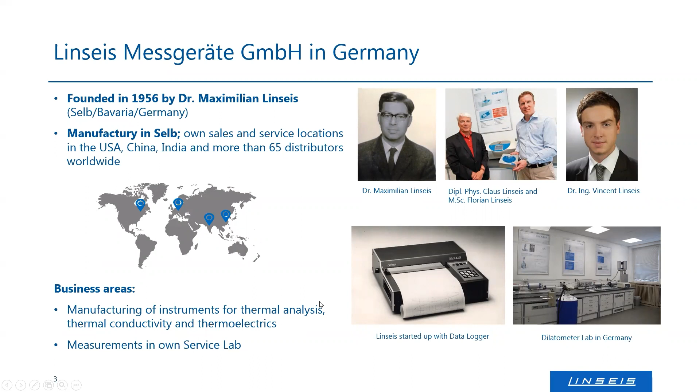The product range we manufacture can be seen on the slide. Usually, I would structure a talk differently if it were about one instrument or instrument series. But as today it's more about hydrogen technologies and what we can do in thermal analysis, I want to go through what's possible and where the research is going on, and then mention which kind of instrument comes into account at what stage of the hydrogen cycle, which we will see in the next slides.

I would just want to show you the overview of products. So we have DSC instruments, we have the classical thermal gravimetric instruments, and the simultaneous thermal analyzers, the combination of DSC and thermal gravimetric analyzer. Besides that, we have a lot of different dilatometers for thermal expansion and shrinkage, as well as sintering studies, and thermomechanical analyzers for deforming measurements, for expansion and shrinkage measurements as well.

And then, as I mentioned, we have instruments for thermal conductivity, which can be flash techniques, hot wire, and guarded heater techniques. We have thin film analyzers. We have thermoelectrical analyzers for microfilms, for thin films, for electrical effects like Seebeck effect, charge carrier concentration, Hall effect. And we do a lot of customization of all these products, meaning we can adjust the temperature range, the pressure range, and the exact sample size, depending on the customer's application.

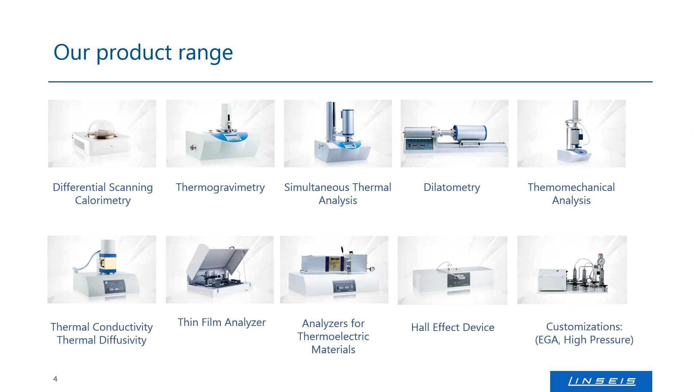Today's topic, back to the topic, is hydrogen and thermal analysis, something that plays a big role at the moment as Germany as well as Central Europe tries to get rid of fossil fuels, get rid of coal, get rid of gas, and tries to be more independent regarding energy. Therefore, there's a lot of research going on, and wherever research is going on, laboratory equipment is also of interest. That's why thermal analysis is strong in hydrogen technologies and is focusing on hydrogen technologies a little bit.

As said, I will structure this talk today a little bit different than I would usually do. I will start with the hydrogen roadmap, so the complete topic and structure of the talk will be along this cycle. The Fraunhofer research facility here in Germany, which is quite famous and involved in many research topics, did a so-called roadmap and plan regarding hydrogen, how it should look like and where the research is going, and what's the goal more or less. I think this structure is quite useful to explain where the research is going on, what they do, and I can show you quite easily where thermal analysis gets involved in this cycle.

The idea is to replace energy that we have, like coal plants, gas power plants, even nuclear power plants, by renewable so-called green energy resources. That means photovoltaic, windmills, biomass power plants that should provide energy. Then the energy shall be transferred by electrolysis or other methods into hydrogen, and the hydrogen is more or less the energy carrier. It can then be stored, exported, used as a fuel or in engines or in technical use, even domestic use would be possible. By using it, it will be transferred back into water, it goes back to electrolysis, and so you have a cycle.

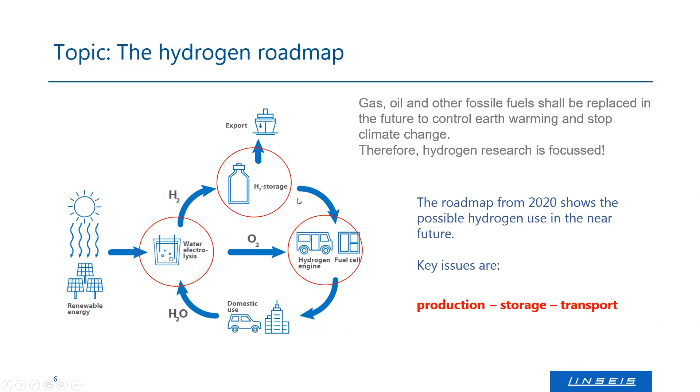The Fraunhofer Research Facility also did this overview about hydrogen research in the near future. I just summarized this a little bit to show you where the research topics really are. So there's a lot of research regarding electrolysis, the creation of hydrogen out of energy, and research regarding storage, platform technologies, production rates should be optimized, the energy transfer rate should be optimized. Of course, there are catalysts that should be used, and so on.

Besides that, the industry does a lot of transfer technologies. They try to use hydrogen wherever methane gas or other fossil fuels are used directly, for instance in steel production. They want to make methane pyrolysis. They want to make ammonia as an engine fuel because ammonia can be a chemical storage way for hydrogen again. They develop high volume storage capacities and many more. So that's what the industry does as well.

And then there's the traffic and mobility sector, because hydrogen storage for mobility is something different than hydrogen storage in technical or power plant use. The on-site hydrogen generation plays a role when it's coming to mobility. So there's a lot of research, there's cooling techniques for mobile storage, there's optimization of the fuel cells themselves, which I will show you, and the fuel cell production lines are also under research.

And then the last topic will also be power generation. So power storage in form of hydrogen is fine, but getting the power back also has many ways. One is the fuel cell, others would be direct burning of hydrogen or chemical reactions. Direct coupling with renewable energy concepts is of interest, and there are also on-site concepts. So that's what really the research topics are at the moment, just to summarize that a little bit. And now I will go through this step by step.

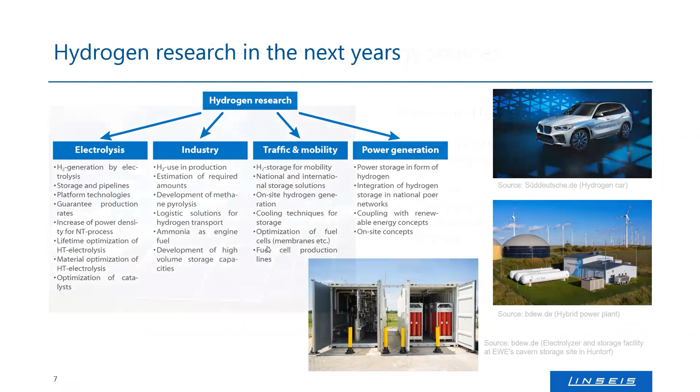As I mentioned, first of all, the idea is to replace fossil fuels, nuclear fuels, and power plants by so-called green energy. Green energy means energy that comes from the sun directly without any emission of carbon dioxide if possible, or if there is emission of carbon dioxide, then it should be so-called green biomass, so wood and not fossil biomass like coal or something else.

The typical resources or typical sources of power are windmills, solar panels like you see here on the picture. Besides that, there are also geothermal plants and biomass plants. As mentioned, the goals are mainly the reduction of carbon dioxide emission and becoming or getting an alternative to gas and oil use.

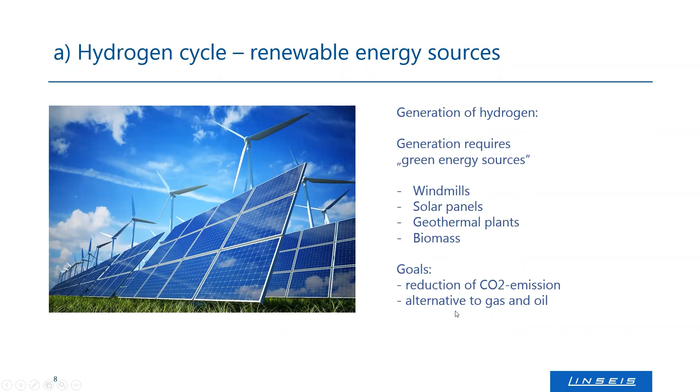When it comes to these kind of energy production facilities, of course there's material research going on. I'm focusing a little bit on the windmills and the solar panels, which is where we already have customers.

The windmill blades are usually made of light composite materials or light alloys because they should not have much weight, to improve the amount of power they can produce. If the wind has to move a very heavy blade, a lot of the wind's power is already gone just moving it. The lighter the blade, the more power you can get. However, the material should be stable. It should not expand or deform much if sun hits it, or if temperature changes, or if the strength of the wind changes. Therefore, these materials undergo quite a lot of research.

I had a customer that manufactured composite materials, glass fiber materials, and composite materials for that kind of blade. They had different mixtures, and the application was to measure the expansion, to measure transformation temperatures when it gets soft, when it bends, and when it changes its phase.

As said, I want to focus on the main steps, not on the energy creation. So the next step would be the hydrogen cycle, the transformation from electrical to chemical energy.

The idea is to create green energy by windmills, solar panels, and power plants, and then transform it into something you can store. You all know electricity cannot be stored that easily. Of course there are batteries, however you need a lot of material and matter to build a battery that can save only a little, tiny amount of energy. They are improving, but a battery that can feed a whole city or a facility like a car production site must be huge, really huge.

The state of the art is that you have to create the power as you need it, on demand, or store it somehow differently. One way, and the way we're talking about today, is to save it as hydrogen.

The idea is using classical electrolysis to create hydrogen out of energy. It's quite easy: you transform your energy into DC. The DC is then applied to the water by an anode and cathode that separate the water molecules into anions and cations. They gather at the anode and cathode, forming hydrogen on one side and oxygen on the other. The oxygen can be released to the atmosphere easily since it's already there, and the hydrogen can be collected quite easily.

So that's where we are already involved, more or less.

Besides electrolysis, there's another way to create hydrogen: out of biomass. If you have biomass like waste from food production, waste from plant harvesting, or waste from animal farming, you can use it not only to fire it or create methane gas and burn that.

Usually it goes like this: you have coal, biomass, or others, and you feed them into a gasifier, which is simultaneously fed with oxygen and water vapor. The water vapor reacts with the carbon contained in your biomass and forms hydrogen and carbon monoxide. If you feed it with oxygen as well, it forms hydrogen and carbon dioxide.

You can separate the gases that are created, using multiple filters to get rid of sulfur and metals like quicksilver or other heavy metals like lead, or whatever is contained in your material. Then you can get clean syngas consisting of hydrogen and others.

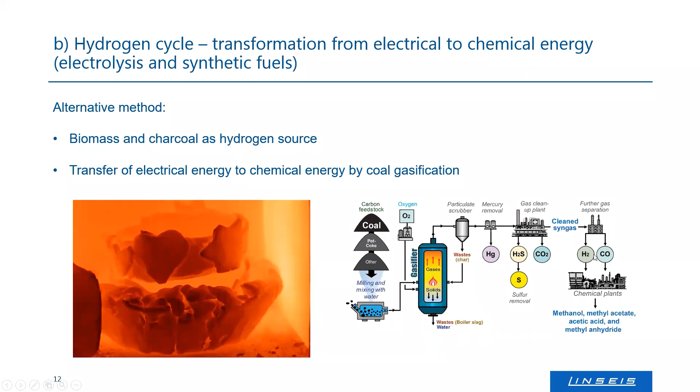Out of that process, of course, you need energy. This energy to heat your gasifier can also come from green energy, from windmill power plants and so on. You can even use the hydrogen you get out of the process to feed that partially. So through this process, you can transfer biomass, with the use of green energy, into hydrogen - that's another way that's possible.

This process has been undergoing research for many years, because people are trying to optimize it, to lower the temperature needed for gasification and to optimize the conditions of gasification. That's where we already have a lot of experience, because we have many customers buying our thermobalances, our machines, to simulate that gasification process.

What we have is a thermobalance machine that can be operated under pressure and in a steam atmosphere. You feed it with a small amount of your carbon-containing sample, heat it up in an atmosphere where you lose all the volatile parts, and then start feeding it with water steam, leading to an immediate mass loss.

If you couple this to a mass spectrometer, you can quantify the amount of gases that come out of your system, and then you can start playing around using catalysts, using pressure steps, using lower or higher amounts of water steam and so on to optimize that process. So this is one of our customer samples, and we have a lot of customers doing this. That's where we are already very much involved in this, more or less hydrogen generation technique.

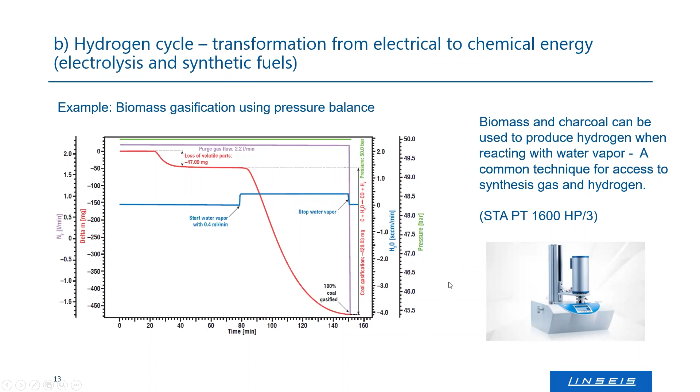Of course, if you change the conditions and even more, feed in oxygen and so on, feed in more hydrogen, feed in more water, you can even find other gases like methanol, methane, and others, depending on how much energy, effort, and gas you want to spend. And that's where we are already involved so far.

Going further in the cycle, coming to the hydrogen storage is one of the key parts. Because once you have created your hydrogen, of course, you now want to transport, you want to store, and you want to use it. Storing it is not so easy. And state of the art, at the moment, there are 3 ways to store hydrogen.

Short time storage is not an issue. Long time storage may be an issue, but anytime hydrogen storage is easier to achieve than electrical power can be stored. The 3 ways you usually can do it is either you use an adsorber, so you can do sorption studies, you can do sorption experiments, you can try to have a metal or metal mesh or other structures with micro or nanopores to do just sorption, so either controlled by temperature or controlled by pressure, you can adsorb it and release it.

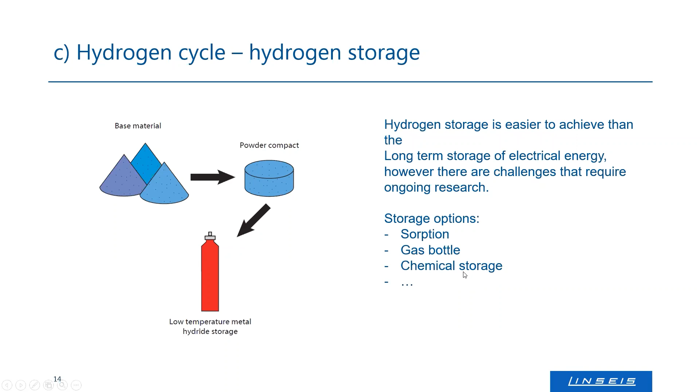You can use classical gas bottles and just press it with pressure into a bottle, or you can do chemical storage by having it react with some other elements or other molecules to form a hydrogen containing molecule that can release it back again, either thermally controlled or pressure controlled or chemically by a catalyst controlled. And even there, we have partners that do a lot of research.

Having a closer look at the sorption, the typical hydrogen sorption takes place at metal-organic frameworks, which is a structure consisting of a metal grid with an organic surface, and the organic ligand or the organic molecules at the surface usually are responsible for forming pores within which hydrogen can be located. And these MOFs or even zeolite structures, which is a ceramic structure also with little micro or nanopores, they can all adsorb hydrogen.

They can adsorb hydrogen by pressure and release it if the pressure is reduced, or they can adsorb hydrogen by temperature. If there's hydrogen present and you lower the temperature, they will adsorb it. If you increase the temperature, the hydrogen will be released again. So that's what's going on regarding sorption.

Besides that, as said, storing it in bottles is usually achieved by pressing it in there. The difficulty by storing hydrogen in bottles is if it's just pressed in there, there's always micro leakage because hydrogen is a very small molecule. It can diffuse out of anything.

So these gas bottles will always have some micro leakages, and therefore they have to be placed and located outside of your building or in a room with a controlled air exchange. It has to be a vented room, and it's always a risk of burning, risk of fire, which is not so ideal. However, it's the easiest and most efficient way to store it at the moment.

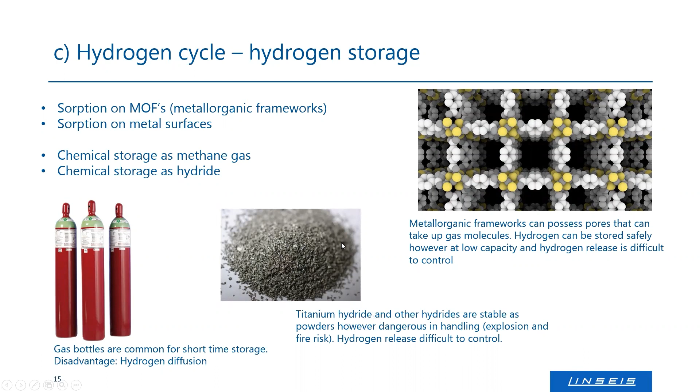You can adsorb it or make it react with some metals like titanium. Titanium can form a hydride, which is more or less stable. There's no leakage, no hydrogen released if you do not lower the pressure and if you do not increase the temperature. And that's the chemical storage that's already going on.

Of course, for all these, mainly for chemical storage and for sorption, we have also partners and customers who are doing research using our high pressure balances again. What we can do here is simulate sorption and desorption processes.

So you can put in a sample, which can be an adsorber. You put it in, you increase the pressure, you lower the pressure, so you can feed it with hydrogen at higher pressure. Then you lower the temperature, you lower the pressure. You see how much weight is gained and how much weight is lost when changing the pressure, changing the temperature. And by that, you can measure sorption curves like in this application example.

So in that case, that's a platinum aluminum catalyst with an active surface. And there was a little particle of 5.5 milligrams roundabout at 15 bar hydrogen.

The hydrogen is applied, and you see there is a peak here, which is the heat absorption that was measured. You see that the sample is reacting, it releases some heat. At 80 centigrade, there is an exothermal reaction when the hydrogen is reacting with the surface.

And what we also did, which is not, it comes on another slide, sorry for that. What's also done, what we did is we had a lot of adsorbers where we just measured the weight change. In that case, we already measured the heat absorption, which is also possible with a TG-DSC instrument.

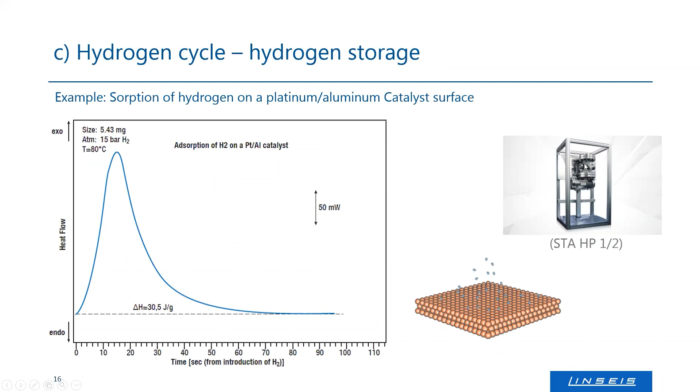Yes. Once you have stored the hydrogen and you have it available, you can use it wherever you want it. If you can control the sorption and desorption, if you can control the availability, you can use it as an energy carrier, you can use it as a fuel.

In mobility, it's a little bit more difficult than if you have it in a power plant, because there you can have a big cell that sorbs or desorbs it. In a tank of a truck or car, state of the art is a cooled tank with just a gas bottle or liquefied hydrogen. There's not much sorption and desorption going on in a vehicle. However, that may be the future as well.

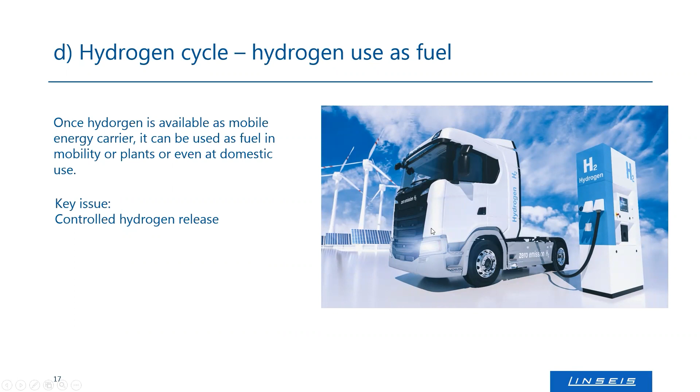In a mobile engine, usually the hydrogen is used not by burning it like in a conventional engine. In case of a hydrogen-driven car or vehicle, usually there is a fuel cell. Fuel cell is one of the hottest topics regarding hydrogen research because it's the inversion of electrolysis. A fuel cell has the job to transform hydrogen and oxygen back into water, providing the energy that you used to form hydrogen, giving you the energy back as electricity.

That is achieved by this complex structure that consists of two chambers, more or less. One chamber is fed with hydrogen gas, the other is fed with oxygen. And in the middle of the chamber there's a membrane. This membrane can be passed by the small hydrogen molecules, but not by oxygen or anything else. So oxygen is hitting one surface, hydrogen is coming from the other side, going through this membrane, hitting it from the other side.

And then there's an electrochemical reaction taking place. The hydrogen is reacting with the oxygen that's waiting here, and doing this it releases electrons. The electrons are conducted through this electrical setup here. So the electrons are flowing over the membrane, going into your machine, providing electricity, and the water is dropping out at the exhaust down here.

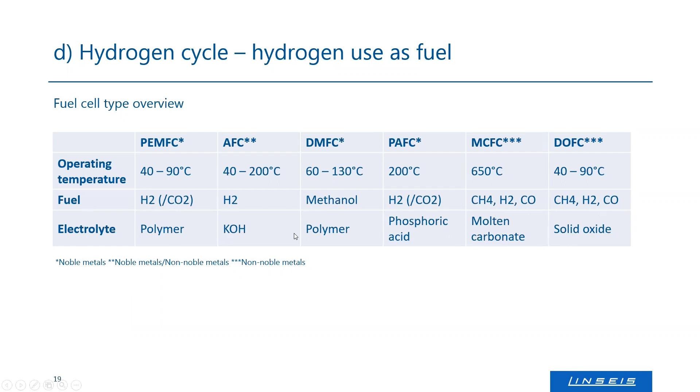The idea is to cover multiple applications, to cover different temperature ranges. So these are just an overview of already commercially available fuel cells. They have different electrolytes in there, different membrane materials. Usually they have polymers, some potassium hydroxide, some phosphoric acids, molten carbonates, solid oxides, whatever, can be fed with different fuels and all have different temperature ranges. And of course, as this is a complex structure, we are involved in investigating these membrane materials.

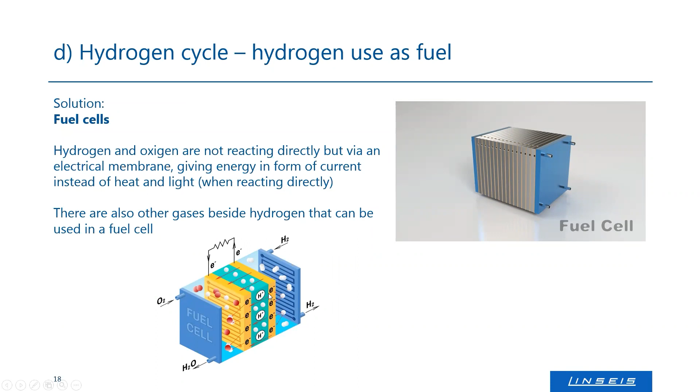We're doing a lot of thin film analysis on that, measuring thermal conductivity, how much the heat that you get during the process has an influence on that, doing thermal stability tests, and also aging experiments with these membrane particles with our thin film analyzers to measure how long they last under certain conditions and when aging takes place and when not.

We have another example here, which is desorption - that's what I was missing two slides ago. So this is a controlled hydrogen release by temperature, where the hydrogen was adsorbed in a titanium matrix. As you can see, you can desorb hydrogen temperature-controlled in a two-step process from this titanium surface, making a constant hydrogen release possible.

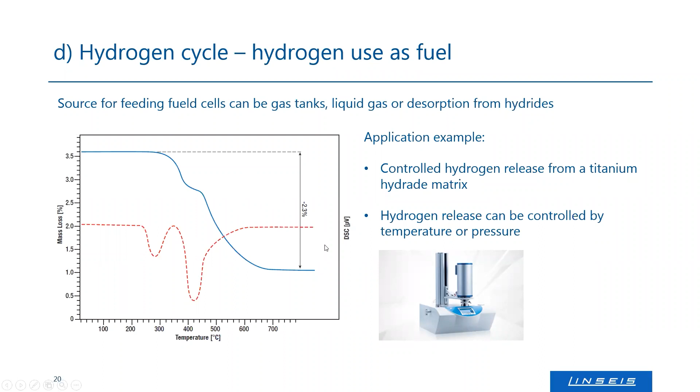And if you have a constant hydrogen release, then you have a constant possibility to feed something like a fuel cell. That was also measured by a thermal balance, as you see here. That was the slide that I was missing two slides ago - I'm sorry for the mix-up here. Once you have this controlled release, you can feed the fuel cell and anything like that.

Another way hydrogen is used instead of fuel is in technical processes directly. We have a lot of customers investigating ceramics and powder metals, doing powder metal sintering and ceramic sintering, and very frequently they ask us to do sintering with a dilatometer or thermomechanical analyzer in a hydrogen atmosphere, because during the sinter process you usually have metals and metal oxides, and if you burn them in air they will form an alloy, but sometimes also form an alloy with oxides.

Especially if you have sinter metals or special ceramics for industrial use, the oxides are not wanted. You want a pure metal structure, so usually the oxygen is removed by the hydrogen atmosphere. If you fire them in a hydrogen atmosphere, you get a different result than firing them in air. That's an example of where we're already involved, so hydrogen sintering is something we typically do.

A typical sinter curve and sinter process looks like this. The green curve shows your heating: you heat your sample to a first target temperature where all volatiles and humidity evaporate, then there's a little holding time, and after that heating to your sinter temperature. During that heating step to high temperature, your metals and raw ceramics start to burn. They start to react with each other, get rid of carbon dioxide, carbon monoxide, and so on, and form your final product.

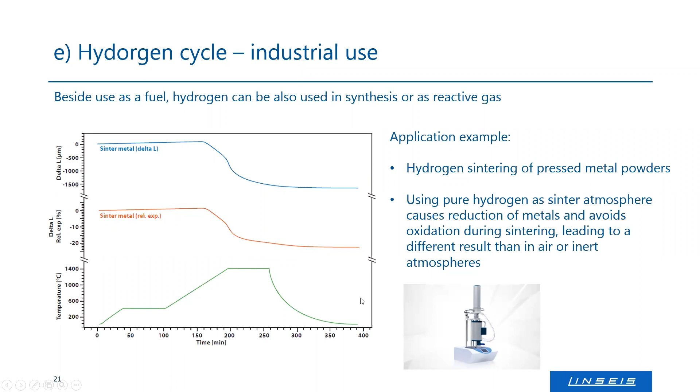In that case, it was a hydrogen sinter process of some sinter metals, which we frequently do and are already involved in. Therefore, we have a special dilatometer that works under hydrogen atmosphere.

However, if you flame methane, you get a lot of carbon monoxide, carbon dioxide, and water. If you burn hydrogen directly, you get water, and a big amount of water in your technical process can affect your final product. So they're investigating both the products in a hydrogen atmosphere and the firing process itself, using our thermal balances and dilatometers in hydrogen atmospheres, to transform steel production from methane use to hydrogen use. That's a very interesting project we're working on, where I can't show curves yet because it's ongoing research. I just wanted to mention it.

Coming to an end, after going through this hydrogen cycle, I want to show you one important thing. I showed our product range at the beginning of the talk, and mentioned that almost every kind of instrument we have can be operated in hydrogen. Of course, we have to modify it a little bit—we have to use hydrogen-tight sealings, make sure there's no leakage, and so on—but they can operate in a hydrogen atmosphere.

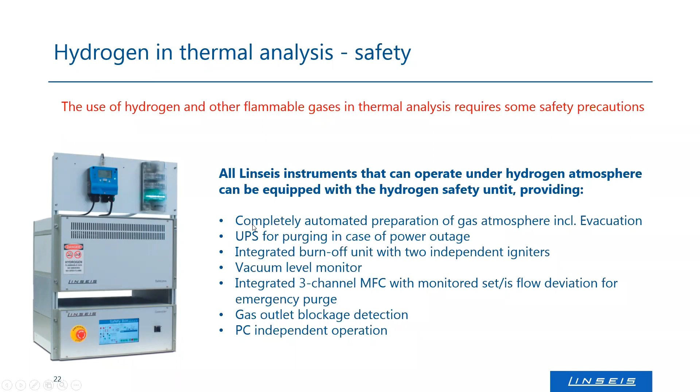In detail, as shown here coupled to an STA system, you have a sensor array connected to gas sensors around your system, within your system, and in the environment. So you can monitor hydrogen leakage in the system, at the system, around the system, and in the room.

Once these sensors detect a hydrogen leak, or an empty gas cylinder, even the inert gas cylinder, or if the inert gas is below threshold, the system will stop the hydrogen flow, close the bottle, flush your system, and bring it to a safe temperature and safe state, no matter what happens. In case a burner fails, there's a power outage, or the furnace cools down too quickly with risk of insufficient overpressure, this automated control system makes sure there's no risk when operating with this complete setup.

If the system brings itself to a safe state, it purges with inert gas for 3 minutes, around 10 times the chamber volume, to get rid of the hydrogen. So you can open your system anytime once it's cooled down to a safe state, with no risk of releasing hydrogen, causing explosions, burns, or anything else.

That's what we do, what we can handle quite well, and that's what we offer with our systems. Just wanted to introduce that to you.

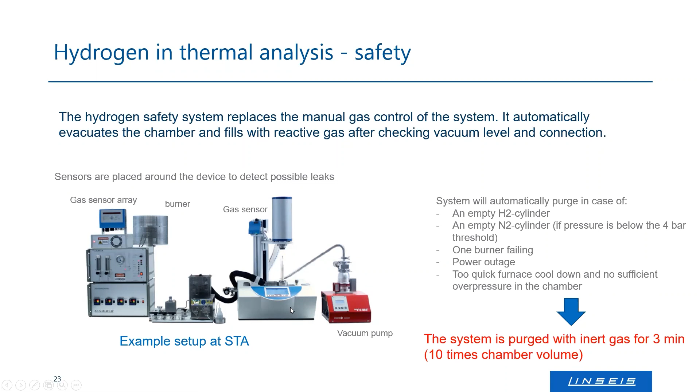One final word about safety: the hydrogen safety system is only one step. We also have an integrated timer. If you use one of our systems in flammable gases, it monitors the working hours and recommends a service interval for when you should perform maintenance.

During maintenance, the inner tubings, sealings, and fittings are checked, thickness is measured, and surfaces are controlled to make sure there's no little crack, no risk of breaking during operation. We use special hydrogen sealings that should be replaced during maintenance as well. The integrated timer monitors the working temperatures and hours and gives you a hint when maintenance is necessary.

Doing this, we are able to operate all our systems in hydrogen atmosphere.

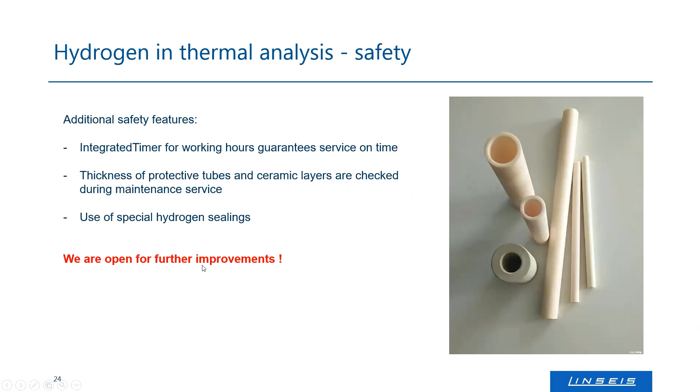So far about the hydrogen topic. As said, this talk was a little different from other webinars where we just introduce an instrument. This was more of an overview of hydrogen research and where we are already involved, just to show you this is a topic we're very much interested in and willing to pursue cooperations in the future.